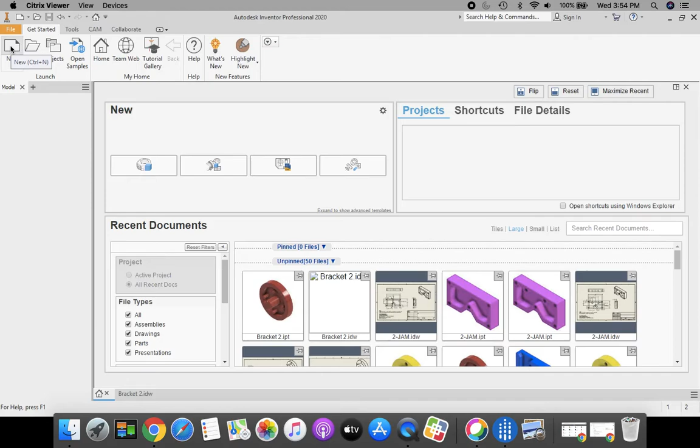To start off, we're going to go to the ribbon bar at the top, select New, Standard IDW, this one right here, and click Create.

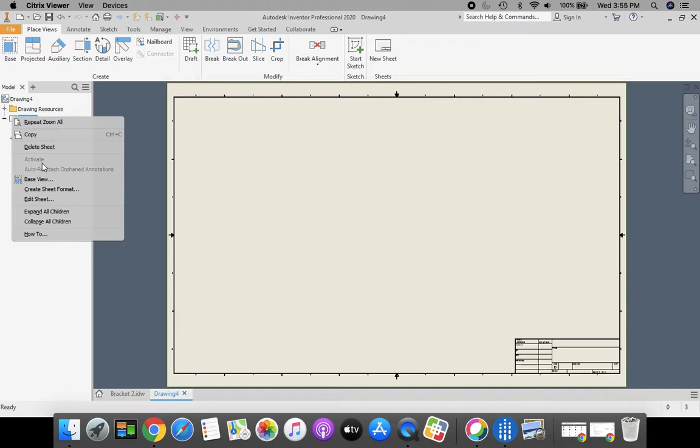Our sheet size automatically defaults as a D size sheet, and that's a little big for what we need, so we're going to change it to a B size sheet. To do that, we come over to our model browser on the left hand side, put your cursor on sheet 1, right click, edit sheet, and select D, and from the pull down menu change it to B. We want this to be a B size sheet, then select OK.

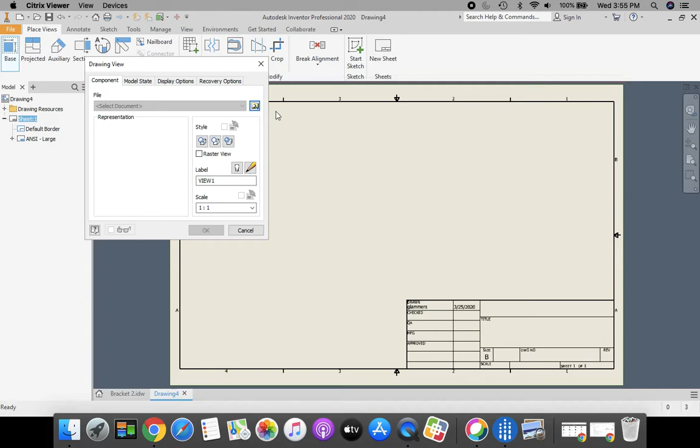Now to get our views on here, we're going to go up to the top to where it says Base in the ribbon bar. Click Base, and go to our Browse folder with the magnifying glass. We should automatically go to our H drive and find our bracket 2. Select bracket 2, click Open, click OK.

We're going to take our cursor, bring it over towards our front view, and get the red dot line going around it. We're going to take and push that over to the left hand side.

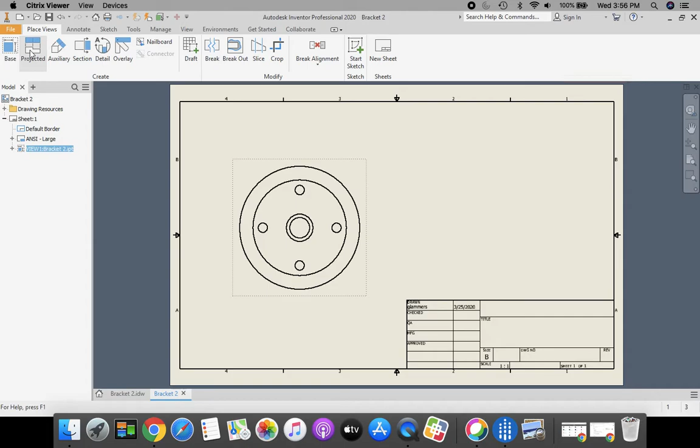Then we're going to click on our projected view, and click to place a right side view, click to place a top view, and click to place a pictorial isometric. When you're finished with that, right click and select Create.

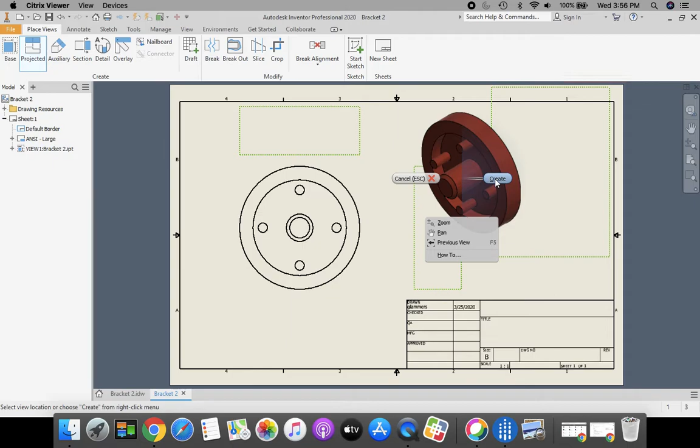Okay, that looks pretty good. If we need to adjust any of our views, we can click the red dotted line to kind of move them around a little bit.

Then we're going to go up to the top above our ribbon bar, and select the Annotate tab. From the Annotate tab, we're going to put some dimensions on here.

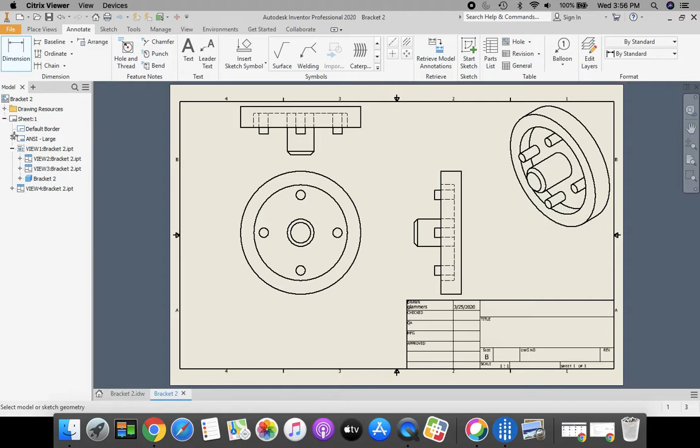We're going to select our post first. I zoomed in a little bit to make it select easier. That's 0.35. Now you can see from our drawing that I have a couple of different things added on here.

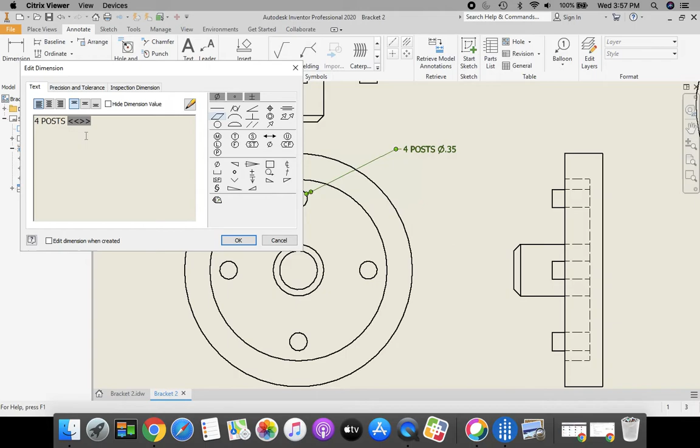4 posts. So I'm going to press the escape key. I can click on this dimension. Now whatever's in the parentheses here, I cannot change. However, I can put my cursor in front of that and type in 4 posts, and click OK. So I have my 4 posts there.

Next, I'm going to continue with my other dimensions. I need to dimension from the center of my part to the center of that post, and I have a few other dimensions to put on here as well. I need the outside of my part, I need the inside of that circle for that recess, and the outside of this middle post.

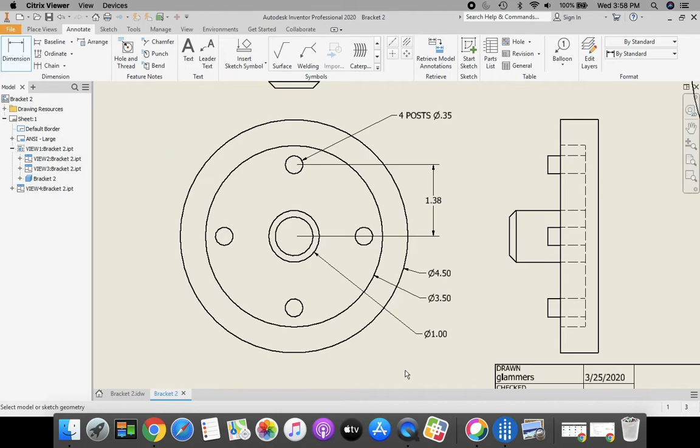Okay, that looks pretty good. Coming up here to the top, I need to establish the heights of some of my areas. So I'm going to click the bottom of that recess to the top of that to show that it's a 1/2 inch deep. I'm going to go once again from the bottom of that recess to the top of one of the posts to show that it's 0.75 tall.

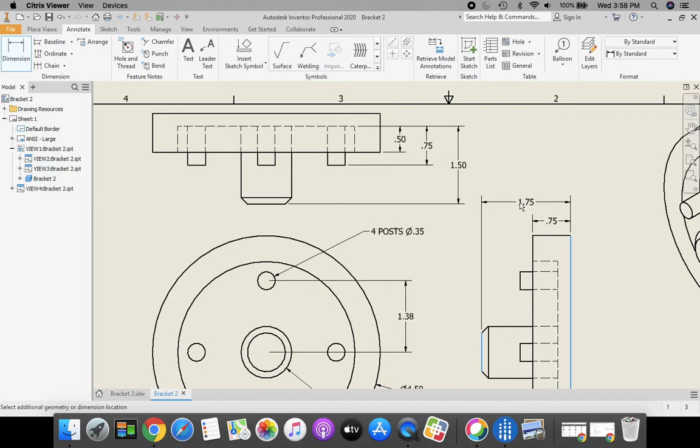And once again, dimension from the bottom of the recess to the top of the center post to show that that's 1.5 tall. And over here, I'm going to give a couple of height dimensions. I want the thickness of this bottom area, 0.75, and then from the bottom of my part to the top of that post, 1.75. There's another one on here that is a little tougher to get.

It's a chamfer, this one that's right here. Next to my hole and thread tool, I'm going to select chamfer. I'm going to click the angled side of the chamfer, click the flat side of the post, and bring that down and find a good spot to place that. Okay, press the escape key.

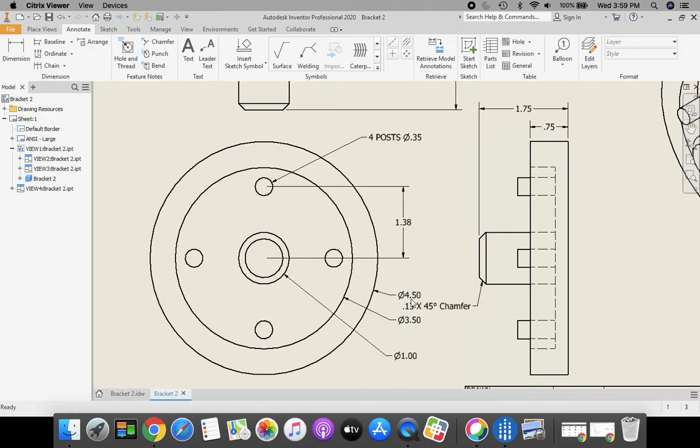Now that one kind of placed my chamfer dimension inside these other dimensions, and that's a little close for us. So I'm going to zoom out just a little bit, and put my cursor by the red dotted line on my side view. Click, and drag this over a little bit more to separate these two views further. That actually looks pretty good.

We're done dimensioning this part and ready to turn it in. First thing that we need to do is go up to the orange file in the top left hand corner, and we're going to save as.

We're going to put this into our H drive. First initial, last name, 000. I'm going to go all the way down to the bottom to find that. Remember, that's the gray box with the green line underneath of it. Bracket 2 is the file name. That's awesome. I'm going to click save.

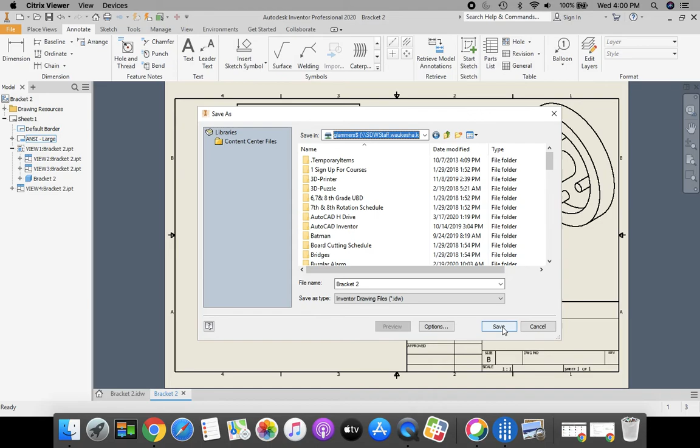The next thing we need is this saved as a PDF file to turn into Google Classroom. So I'm going to come up to the top by the orange file in the top left hand corner, go down to export, and export PDF. Once again, first initial, last name, 000. File name bracket 2 is good. Click save.

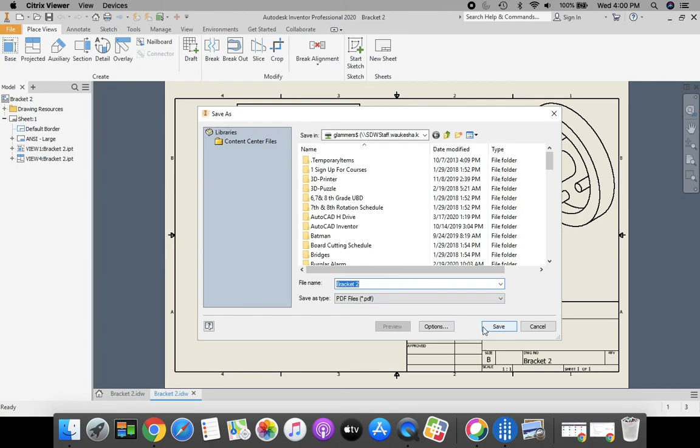You're done dimensioning your drawing. Make sure you turn in that PDF to Google Classroom. Have a great rest of your day.